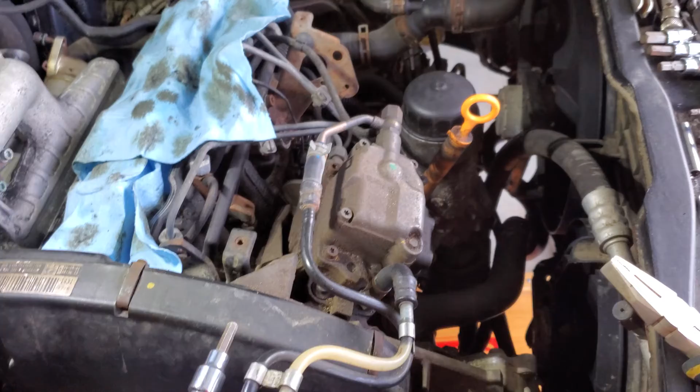So as per typical Volkswagen, overnight it's barely changed, might be down an inch. I'm going to fiddle around with some of the pipes and see if I can get the airlock to release and get the rest of the coolant going into it. By the time we get other things wrapped up, it'll all be air bled and we'll be ready to fire it up and run it to temperature.

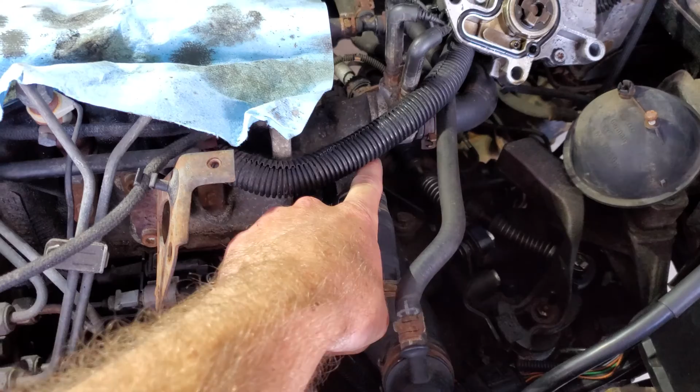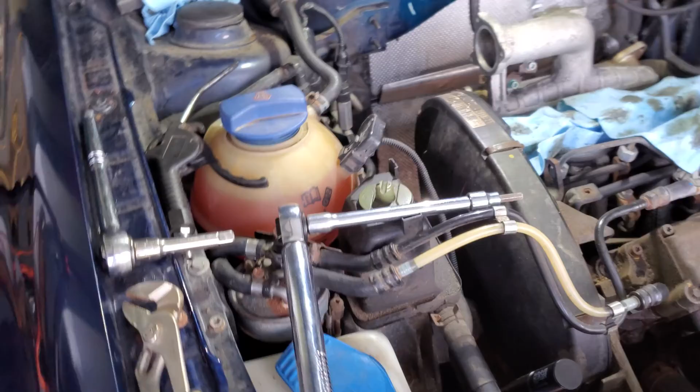I tried this main rad hose last night and there's no coolant there, and it didn't let any air out either, so maybe I'll try the thermostat one. What I'm probably going to have to do, which is what I have to do with the Mark IIs, is pour coolant into the block side of there and into the rad side of here and then stuff it together to get the whole thing full, because the thermostat won't open to let air or coolant through for bleeding purposes. So we'll see how that goes, and then get back to putting stuff together on the back side of the engine.

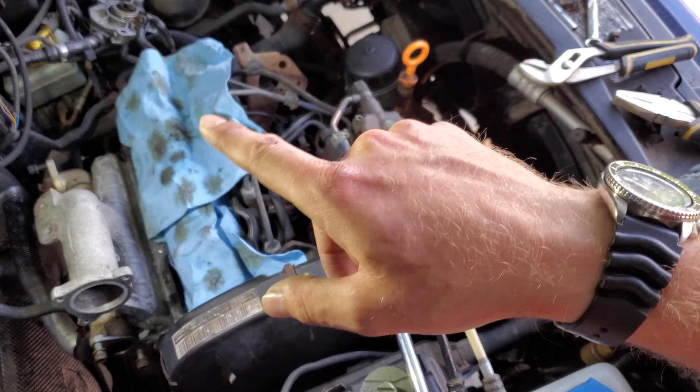Alright, so I was able to get most of the coolant that I took out back in by pouring it into that pipe there from the exhaust cooler. I took it back up and stuck it up in the air, took it back off and stuck it up in the air, and filled it.

The reservoir is still overfull, but as soon as the coolant flow starts circulating, that should drop. So let's get back to wrapping stuff up here.

The exhaust cooler, I think, is ready to be tightened. The only thing I was concerned about is whether the pipe that has to go between the exhaust cooler and the exhaust manifold wouldn't line up if I tighten it up first. But I think we'll try it and see how it goes. Hopefully it won't be an issue.

So I'll go through - this is the last cap screw for the three that hold the cooler to the manifold. Go through and anti-seize all of them, put them on there, and then the mounting cap screws - we're pretty sure they're M6, 7 foot-pounds, which is the 84 inch-pounds.

So I'll do up those mounting cap screws to 7, and then that elbow that goes from the cooler to that top flange on the manifold - those ones are...

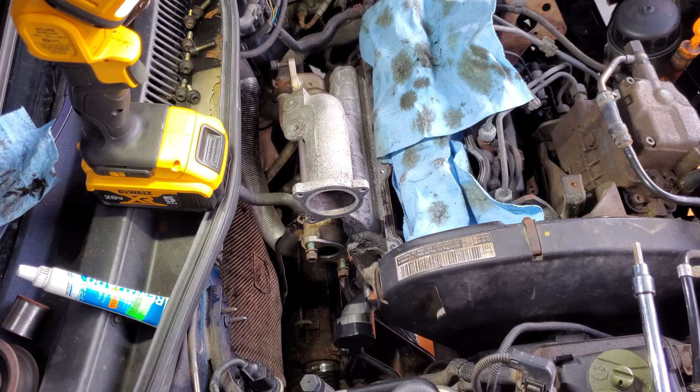And I've got new metal gaskets for both of those. I'm not going to bother with any new gaskets for the actual EGR mounting right now because I've got a new EGR coming - we still have to clean up the old one just to be able to put it back on for now. So I'm going to buzz through, get the cooler mounted and torqued up to 7, and then get the actual cooler pipe connected, and hopefully it'll line up without having to loosen the exhaust cooler or EGR cooler again.

Alright, so I had to run the tap through the threads on the cooler - I should have done that beforehand. I should have known, as rusted as they were, that it would have needed to be done. But that pipe is now connected, new gaskets and torqued. So we're getting really close on the top side here now.

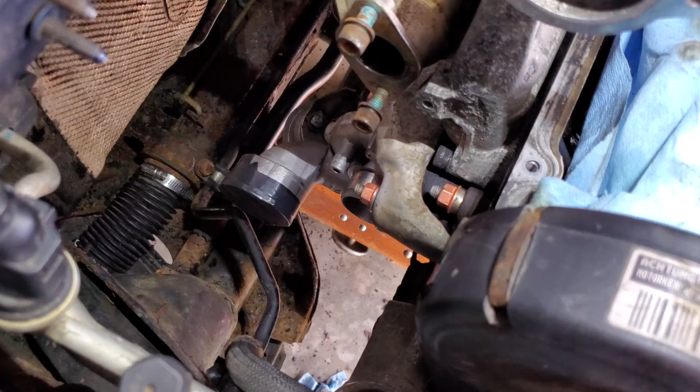So I think I'll go down below now and get the - I think that should be okay. I'll go down and get the intercooler pipe connected and the intake pipe brought up to the top here.

And then after that we should be able to do the rest of the intake part, the EGR and whatever, and we'll get the valve cover on sooner rather than later here so the RTV has some time to cure a bit before it gets heated and oiled.

But yeah, won't be able to show much on the bottom side, but there's really not a whole lot to it. Like I say, get the pipe connected back to the EGR, or intercooler, try that again, and then the intake pipe from the turbo up to the top here goes up through this space to go across to the airbox.

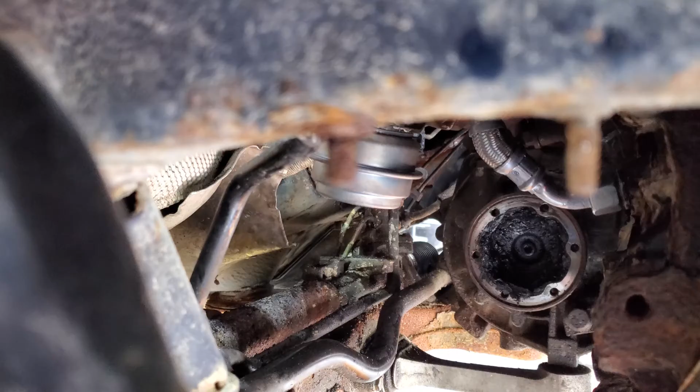The stud that's supposed to hold the pipe to the intercooler - the nut twisted the stud off when I tried to take it apart because it was a rusted mess. So I gotta figure out what I'm doing with that. May just cut that off clean and drill another hole through the plastic tube beside it and thread a fastener there. It doesn't take anything to hold it up. And then it clamps back into the EGR here, or geez, can you tell it's Sunday?

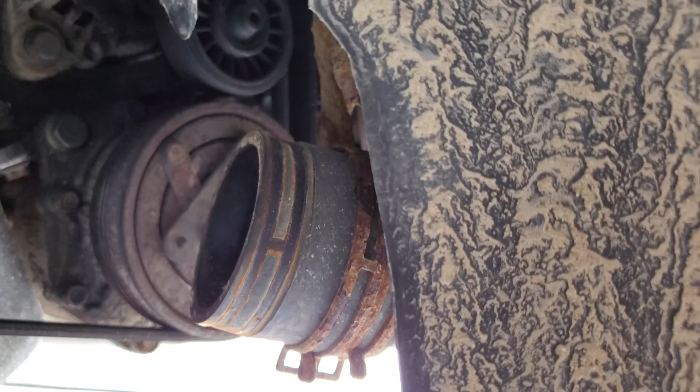The intercooler there. And then once the intake pipe is on and the EGR pipe, oh, here we go again, intercooler pipe are on, then I think that's pretty much it from the bottom side. So the CV axle can go back on and get torqued. That's going to be fun.

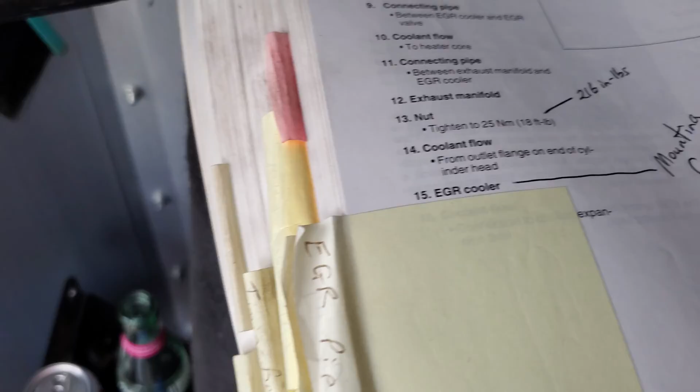And the CV joint shield. So let's get all those torques right now, because I'll just lapse most of this. So I really hope that's in the right place. But the fasteners for the intake pipe to the - what is that, manifold - to hold it for support. What's that going to be?

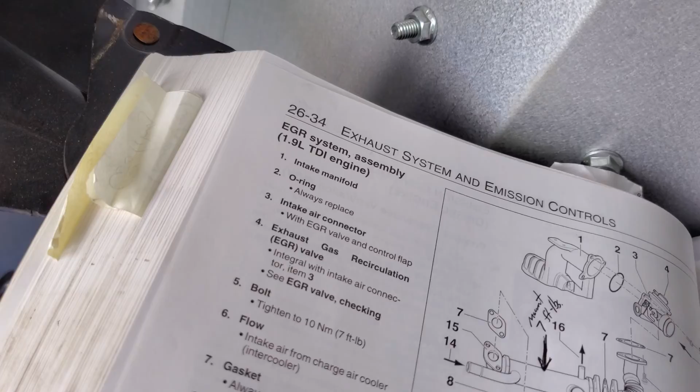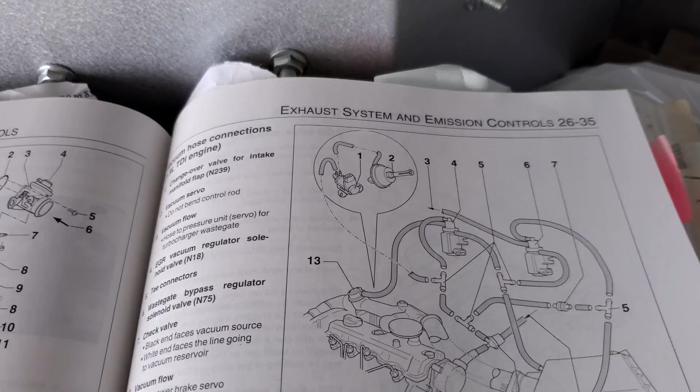Injection pump, EGR, piping, should be with this stuff. Nope. Well, I can't actually find it in the manual. I don't know why it doesn't show these fasteners for mounting the intake, but they're exactly the same size as these ones here for the EGR.

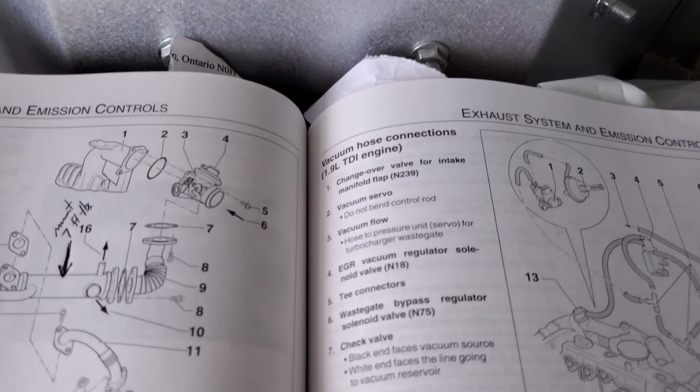Where'd the EGR go? Those ones are the normal 7 foot-pounds for M6 cap screws, so that's what I'm going to go with for those that hold the intake pipe in place, and also the 3 for the EGR mounting itself, but we'll get to that when we actually mount the EGR.

So I'm going to go down below and I got to take the tape off of that spigot still and get all those pipes down underneath, and probably torque up and get the axle shaft reinstalled if I think I'm done down there, and get it torqued. 14 is the bolt to the hub flange.

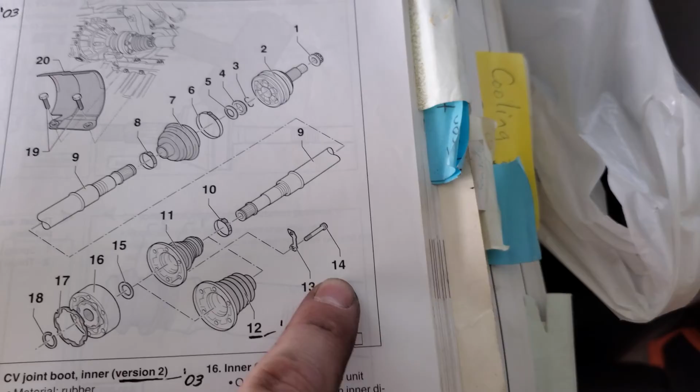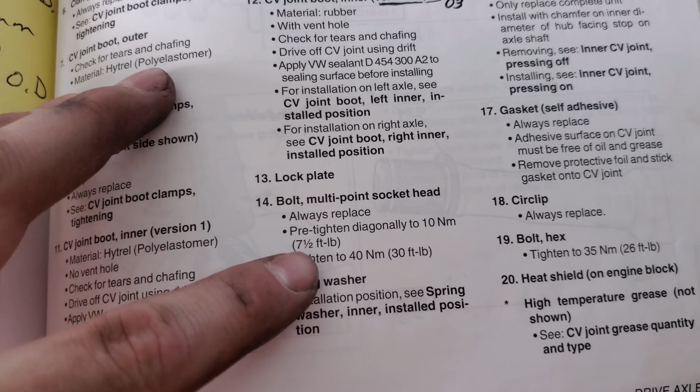Okay, you gotta be kidding me. They're always replaced - you gotta be freaking kidding. Pre-tighten diagonally to 7.5 and tighten to 30. I'm not replacing them, forget it.

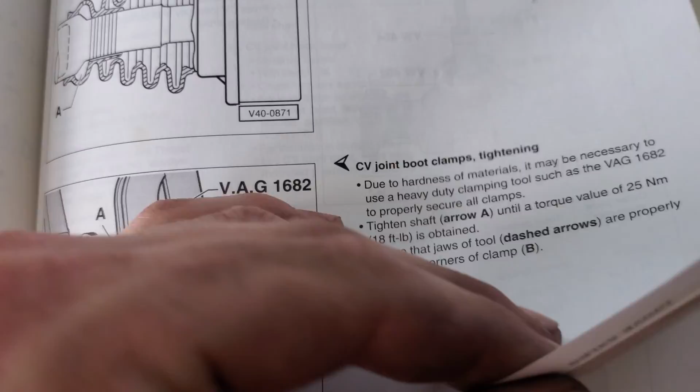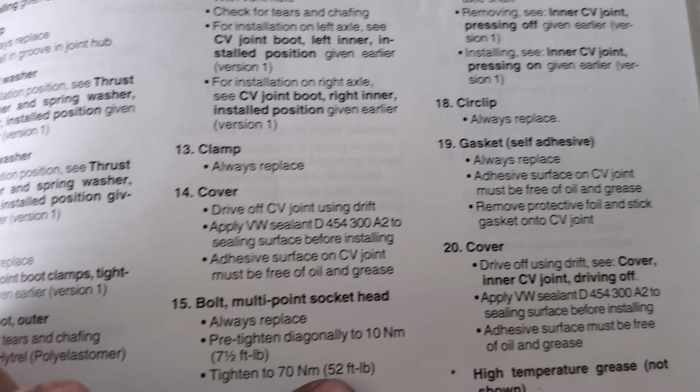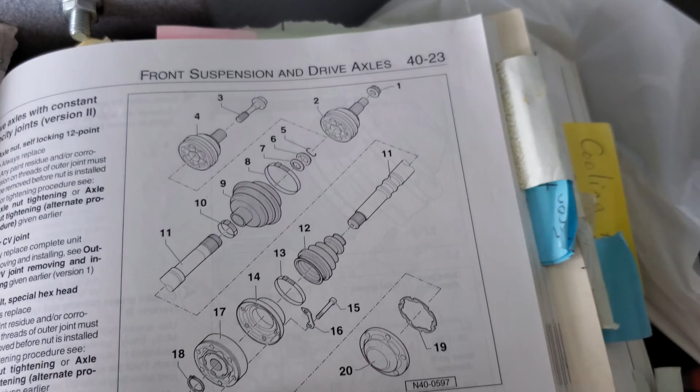Where is version 2? Does it say? This is version 2 - what's the torque for them? 52, oh my goodness, that's a little bit of a difference. Sure, it'd be nice to have an easy way to tell which one is which.

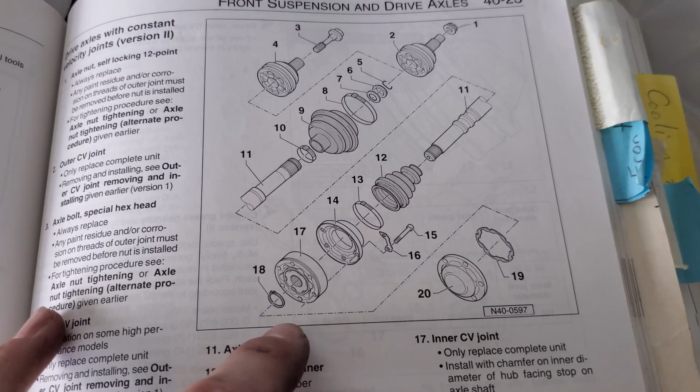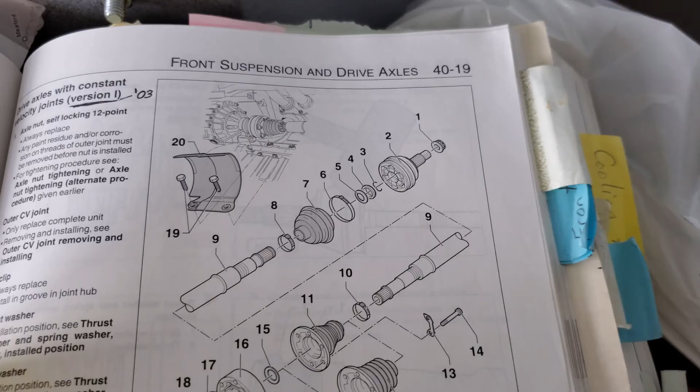It's special hex head. We don't have that, so I'm pretty sure - yeah, okay, so we're version 1. We've only got the axle stub through the hub with a 12-point nut. So we are in fact going to tighten those axle bolts, or hub bolts, 14 to 30 foot-pounds.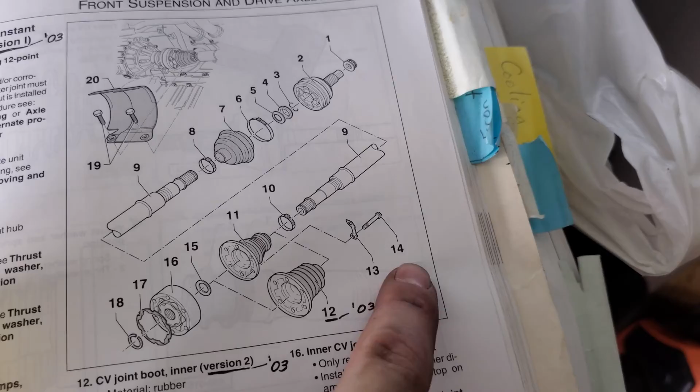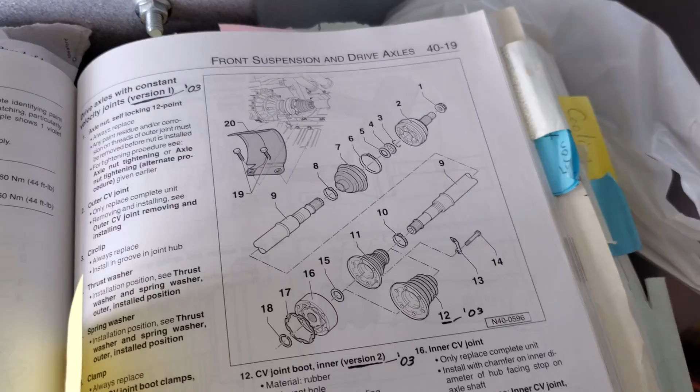I'm not going to replace them. That's crazy, I've never replaced CV axle bolts ever, and I've never had any problems with them undoing or with them breaking. So I think that pretty much covers these guys here for the CV shield, 19, 26 foot-pounds. So I'll do those up as well with more anti-seize on them once the axle's in place.

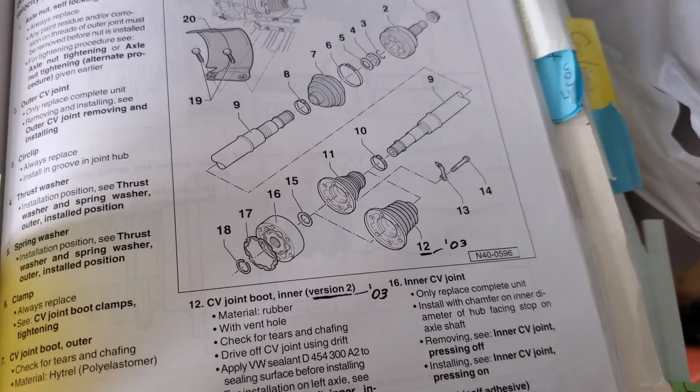And then yeah, I think that's about it. The rest of the intake piping stuff are just squeeze clamps. Speaking of which, I have to get the pipes off the roof still. And we'll try and get that all wrapped up on the bottom side so that we're getting closer to having it sealed up here.

All right, so quick update here. I'm just motoring right along. I want the car done today.

Okay, so the intake pipe is on and clamped, and the 2 bolts that hold it to the intake manifold are torqued, 7 foot-pounds each. The pipe from the turbo to the intercooler is installed. The spring clip is on the turbo end of it, just like the opposite end of that short pipe that I swapped, and we're spring clamped to the intercooler.

And I fixed up the mounting to the frame rail, just cut the stud off, drilled it out, threaded it, and put a bolt in it. So that's all looked after. Let's go on here.

And then I went ahead and put the exhaust pipe on while the axle shaft was still out of the way, because it was way easier. So new gasket, new copper nuts, and those ones were supposed to be, I think, 18 foot-pounds as well, same as all the rest of the copper nuts. So I did the bottom one that I could torque, and then I just matched the other 2 to the first one with the ratchet.

The exhaust was all connected now, and then I put the CV axle on, back onto the transmission, torqued those 6 internal 12-point bolts to 30 foot-pounds. And I put the CV axle or CV joint shield back on there and torqued those to 26, I believe it was, foot-pounds. I have yet to put the ball joint and tie rod ends and whatever back together. I still have to tighten the inner tie rod end on the left, on the driver's side, but we'll do that after. Now we're gonna get, I think I got everything.

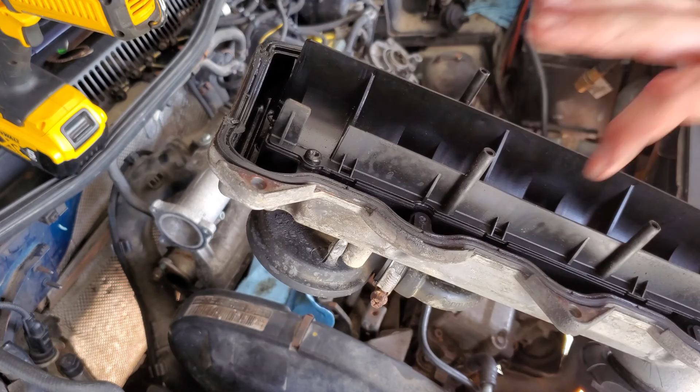Just did a quickie clean job here to get majority of the oil residue off of it, just to start fresh. It's going to likely have some again in short order, but we're going to put RTV on the gasket, even though it does have a rubber gasket or some kind of a rubber/plastic. It is 20 years old, but they never seal anyways, and you can't replace the gasket. You got to buy a whole valve cover.

So I just did a quick cleanup on that outside. I'll do a wipe of the seal surface here before we put it on, and I'm going to go around and clean up the surface of the head, make it spotless, and then we can get the RTV on there and get the valve cover installed and torqued so that it's starting to cure while we finish up some other stuff before we run the engine.

But it's nice. Yeah, we're getting there. Get this valve cover on, and then get the vacuum pump on and the other brackets that are associated with that, and then we'll be pretty much finished with the engine itself. Got to do the EGR, of course, install the rest of the intake pipe and the airbox. Yeah, but it's coming along.

So I'm just going to go through, let's turn this on for some light here. I'm going to go around the valve cover surface first with a shop towel and some brake clean on the towel. I'm not going to spray anything on the engine. And then I do have some basically Scotch Brite pads to take any congealed oil off without removing aluminum, because it's all aluminum, of course.

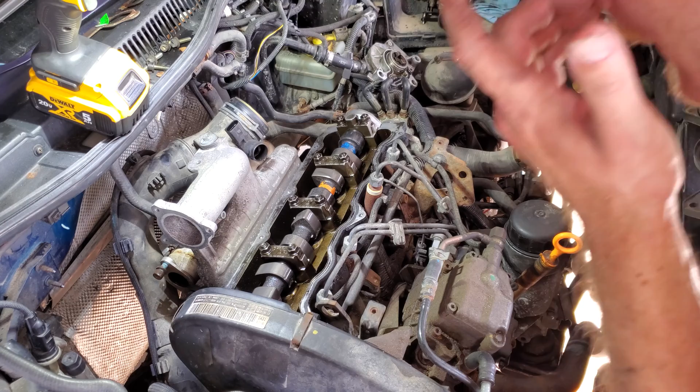As the wind blows all of the dandelion seeds into the building, of course. So let's make this quick before the engine's full of debris, any more than it already is. I think I did pretty well so far with not getting too much in here. But I don't think I'm too far away from oil change, so I'm not too worried about it.

And with the new camshaft, it's probably not a bad idea anyways to do an oil change in fairly short order. We also have to do the camshaft break-in once we get it going, which I will talk about when we get to that point. And of course set the injection timing kind of last thing once it's up to temp. So yeah, let's get this valve cover on and torqued so that we can be done with that, get the vacuum pump going, and then probably move on to the EGR.

I gotta clean it out still, it's over there, can't really see it. It's full of sludge still, so I gotta do a whole clean on that. Just temporary, because I've got new EGR coming next week, I think it is. So in the next week or two, I'll put the new EGR on with new gaskets, and we should be ready to roll in that respect. So yeah, let's get this done here.

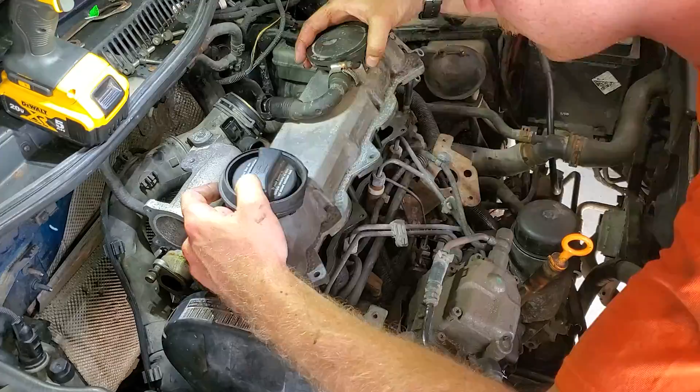Alright, so as you saw there, I just made sure the cylinder head was completely spotless and no rough patches. If there is, use the Scotch Brite, not steel wire brush or sandpaper or anything crazy like that. Emery cloth, maybe. I made sure that was spotless. I tried my best to get the oil off of the valve cover seal, but didn't do a terribly fantastic job. And then I took the time to do a good bead all the way around the entire perimeter of the valve cover, including over the bearing caps. And it's sitting in position there now.

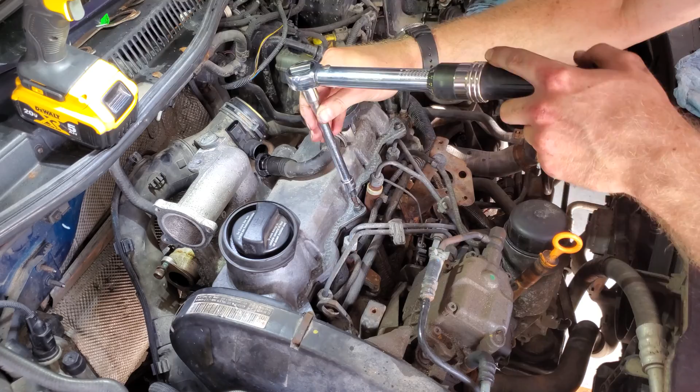And the torque for the valve cover, they don't call it that, of course. It's cylinder head cover to cylinder head, M6, which is correct, 89 inch-pounds. So I'm gonna go 45 first on all of them, working from the center out, just like I've done on other things. 45. And get this kind of tightened down before our RTV sets. Of course, I can't find.

Go in the bolt. It's really not that difficult. Alright, valve cover is done. Minimal skin removed. One bolt casualty, which I will address another time. If I had another bolt handy, I could just swap it right now, but I was able to torque it is the biggest thing, and undoing it shouldn't be an issue later on.

So there's nothing I can do about the timing end of the valve cover as far as RTV oozing out, but on the other end here, actually it's not too bad. Just want to make sure that there isn't any excess that's going to cause problems for the vacuum pump, although we are going to put a bead on the vacuum pump as well, because I know it doesn't seal anyways. I do have a new O-ring, but there's not even any point in putting it on.

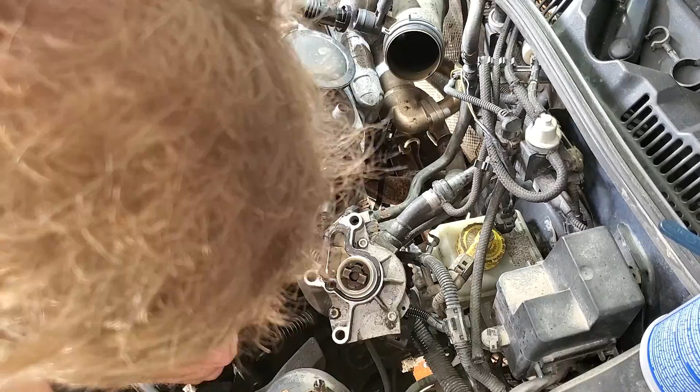Alright, so vacuum pump is installed and torqued. One thing I forgot to mention about putting it on, the flat drive on the vacuum pump has to line up with that slot on the camshaft that we've been using for valve timing. So it's a bit of a playing game to try and line it up before you put it in.

The problem is there isn't enough clearance between these coolant preheaters and the cylinder head to really get the pump in there. I don't know if it would be any better if you took these off, but I wouldn't recommend touching them because chances are they're going to completely crumble to nothing if you twist them or pop them too much.

So I just tried to get the drive close to where I thought it was supposed to be, and then you got to squeeze it in past the heaters there between the head, and then you can kind of release the pressure and turn it a little bit and try it, and eventually you get it to fall in. And I just tried to get it close to the right place to start with so that the RTV wasn't getting smeared all over the place.

There was some oil in the lower part by the little oil passage hole when I was putting the RTV on, so it's probably not going to seal too well, but it'll be better than without. So that's got that torqued. I just have to put the little brackets on those 2 studs that are sticking out there now, which I think are mainly for the vacuum line for the vacuum diaphragm.

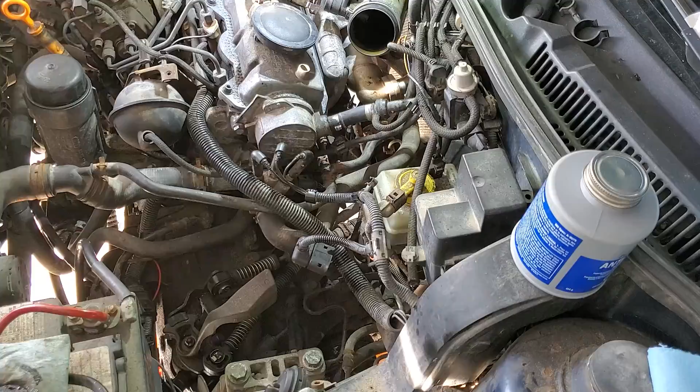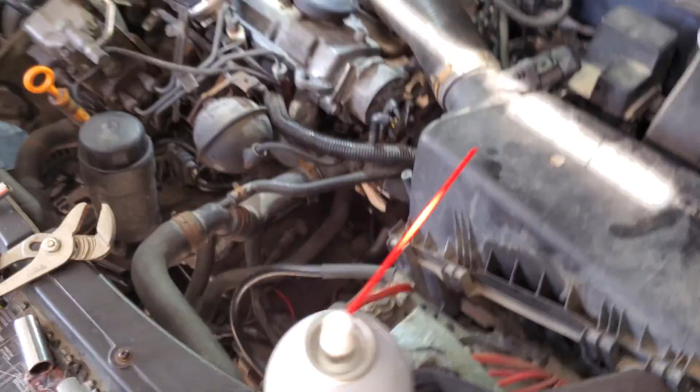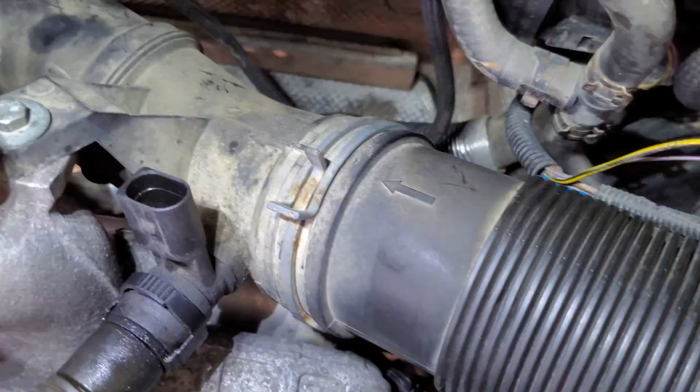There's, of course, the arrow for direction of flow into the engine, and there's actually notches right here. There's a rib on the tube, and a little notch on the other pipe to tell you where to line them up. This one not so much, but you're just making sure that it's not twisted basically. So that's got the airbox installed. I still got to tighten that cap screw, and our MAF sensor plug is back on.

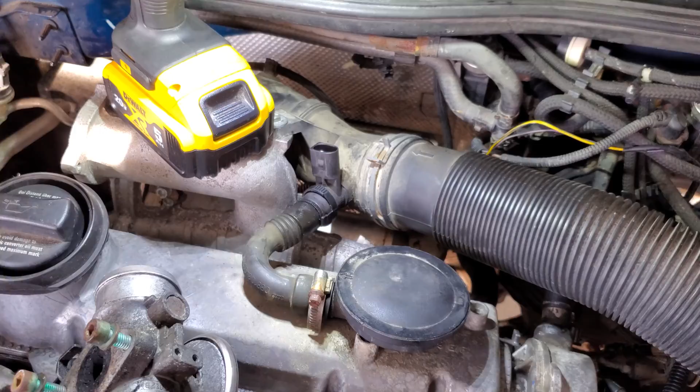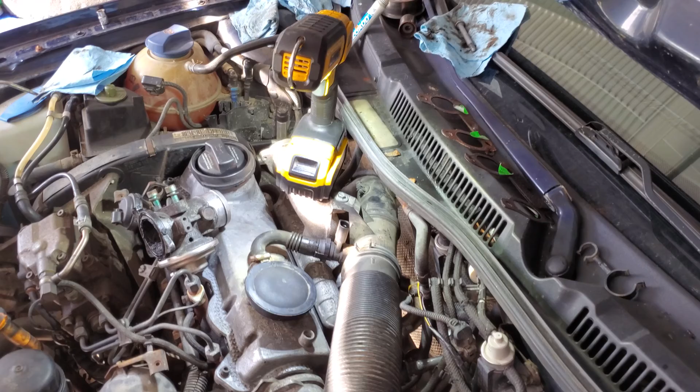These two plugs are for the MAP sensor there, and the other one's for that vacuum valve that I mentioned before that clips onto the intake. So let's bring this in here again. We will try and get those other lines replaced that are for the EGR.

Gonna sit there, probably not. Fish these back across. That's supposed to be in there. This one is as simple as this. I should blow it out first. Grease everywhere. It did actually have grease in it. Good. I probably did that before. Like that.